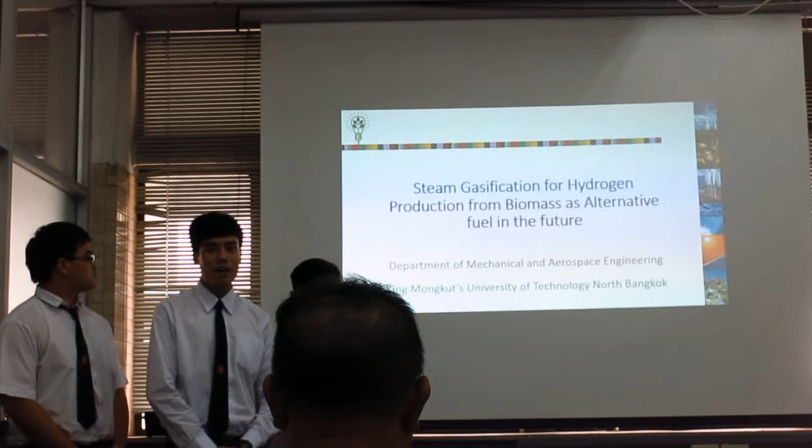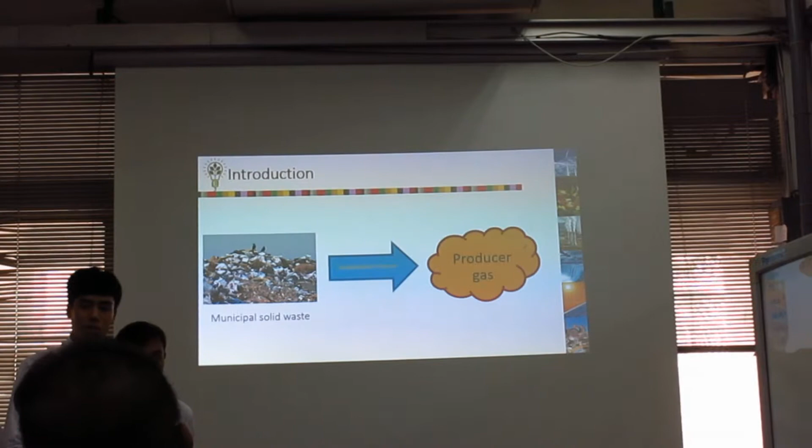First, I would like to give you a little background. Our purpose is to convert Thailand's municipal solid waste into energy through the process of gasification. Our research aims to produce hydrogen as much as possible, so we use steam as the gasification agent.

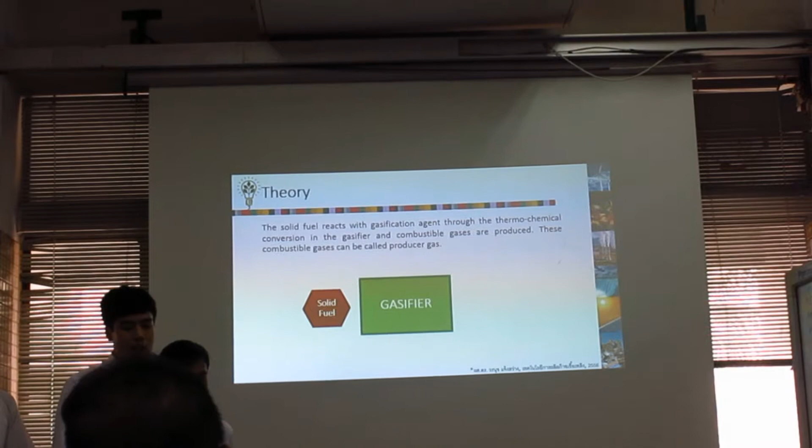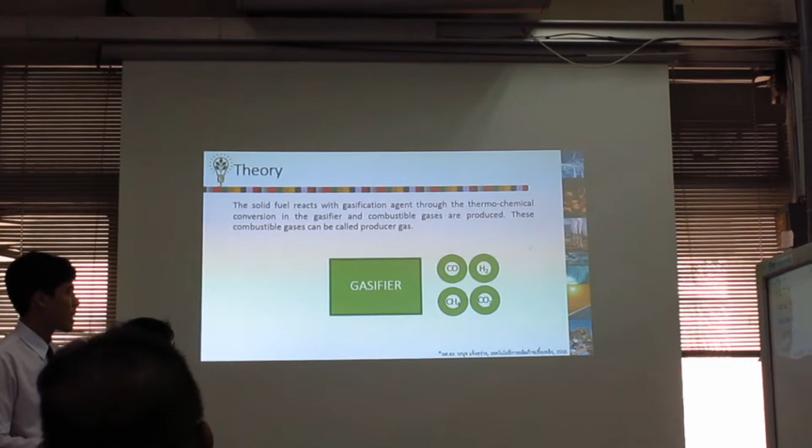From the theory of gasification, it's defined as solid fuel reacting with a gasification agent through thermochemical conversion to produce producer gas. The main producer gases are hydrogen, carbon monoxide, carbon dioxide, and methane. There are three types of gasification agents: air, oxygen, and steam.

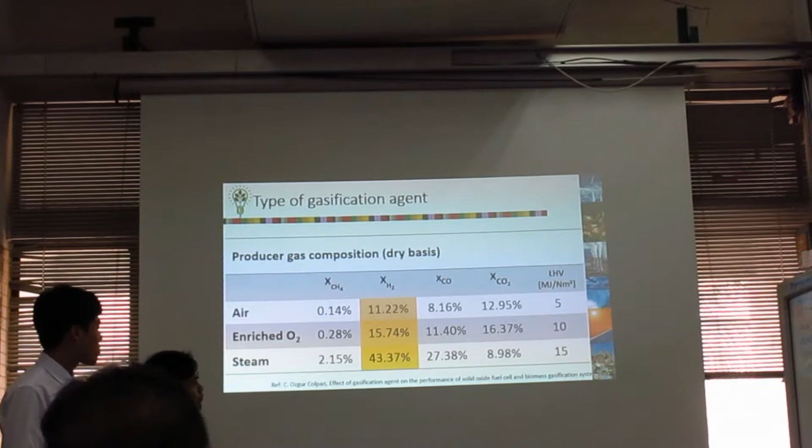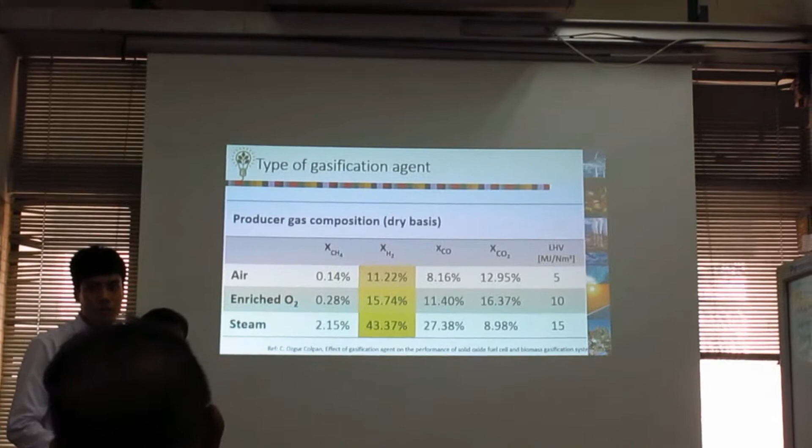In this case, we are focusing on producing hydrogen-rich producer gas, so we use steam as the gasification agent.

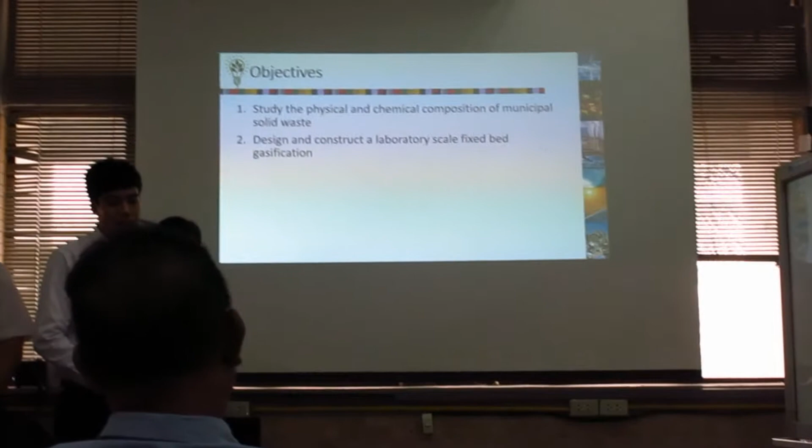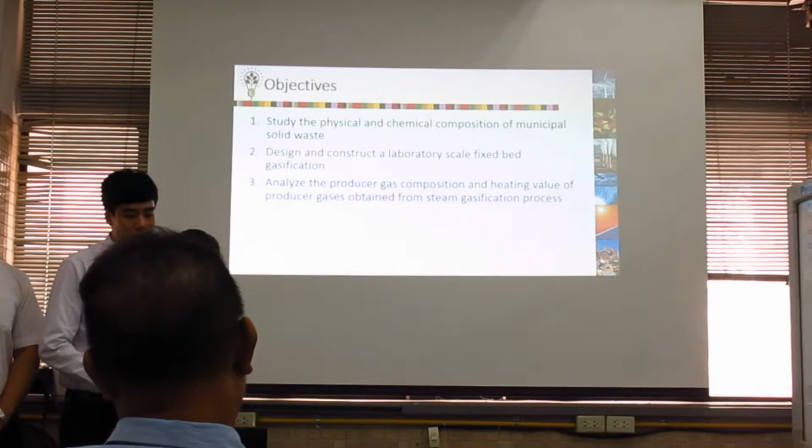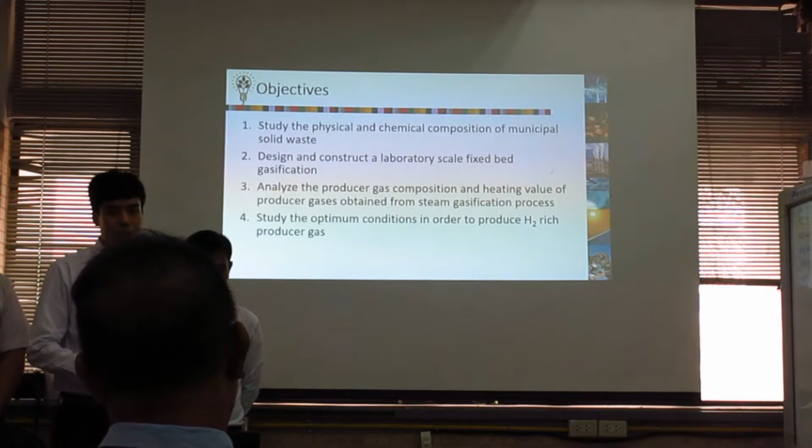This introduction brought us to the following objectives: first, to study the physical and chemical composition of municipal solid waste; second, to design and construct a laboratory-scale fixed-bed gasifier; third, to analyze the producer gas composition and heating value obtained from the steam gasification process; and last, to study the optimum condition for producing hydrogen-rich producer gas.

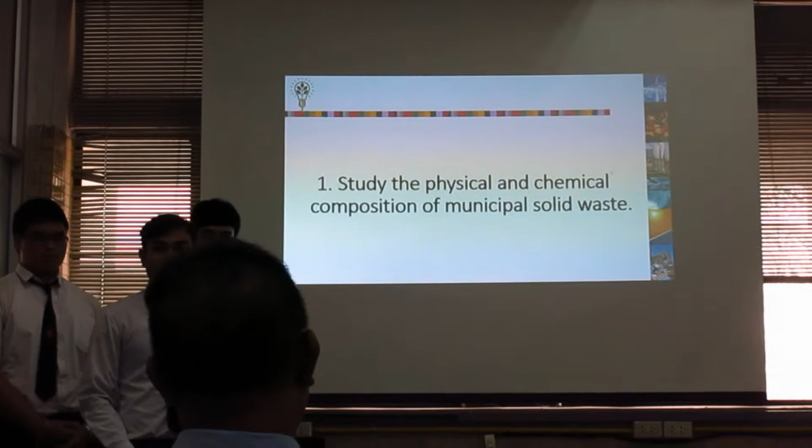So let's start with the first objective, which is to study the physical and chemical composition of municipal solid waste.

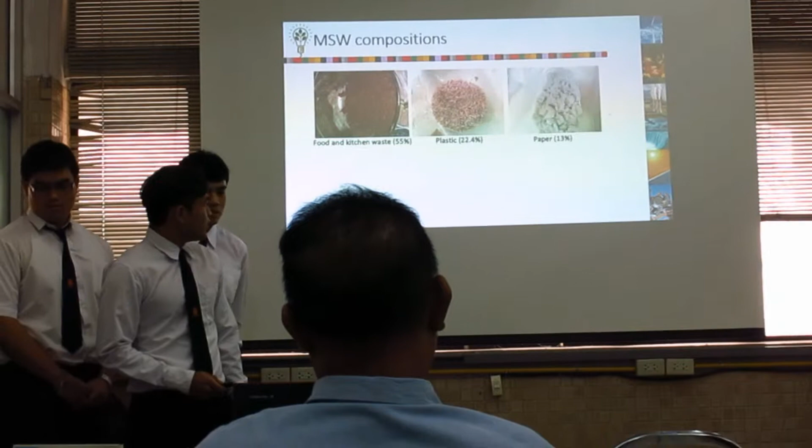From the literature review, these are the waste compositions we considered: food and kitchen waste 55%, plastic 22%, paper 13%, yard waste 5%, textile 3%, and rubber 1%.

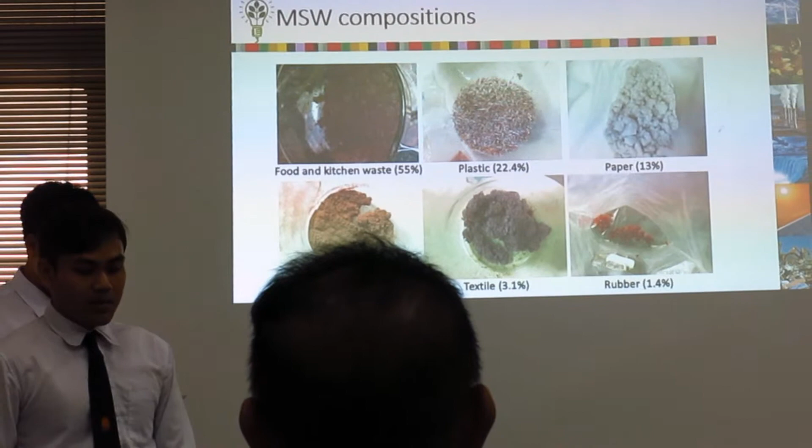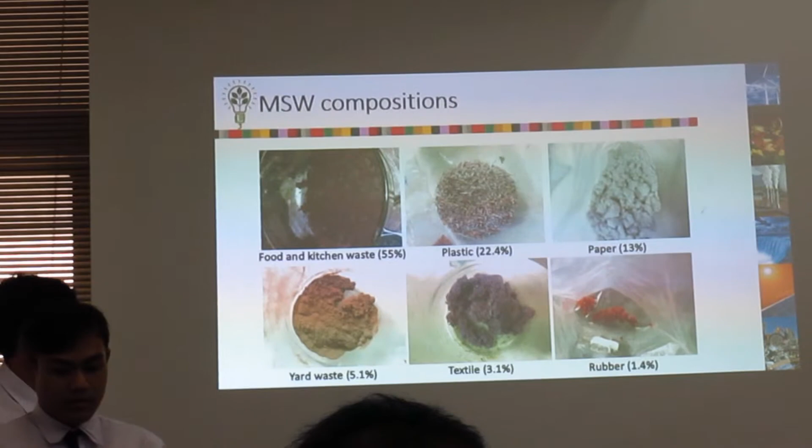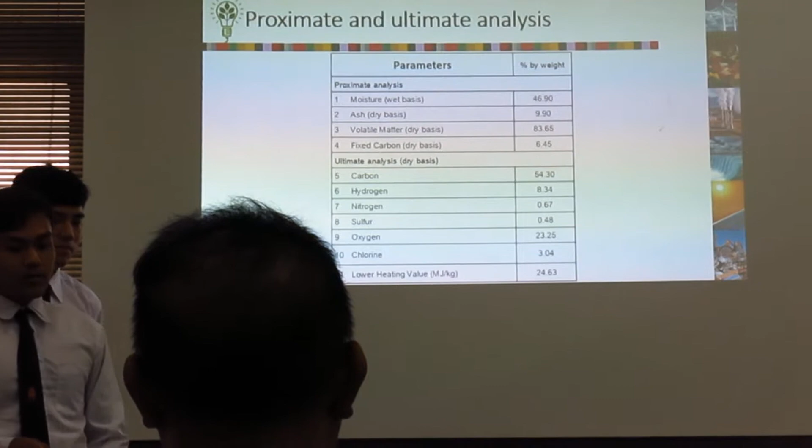This composition was prepared as a surrogate of municipal solid waste for our experimental sample. After that, we analyzed the composition of the sample, showing proximate and ultimate analysis. Proximate analysis shows the physical components, and ultimate analysis shows the chemical components.

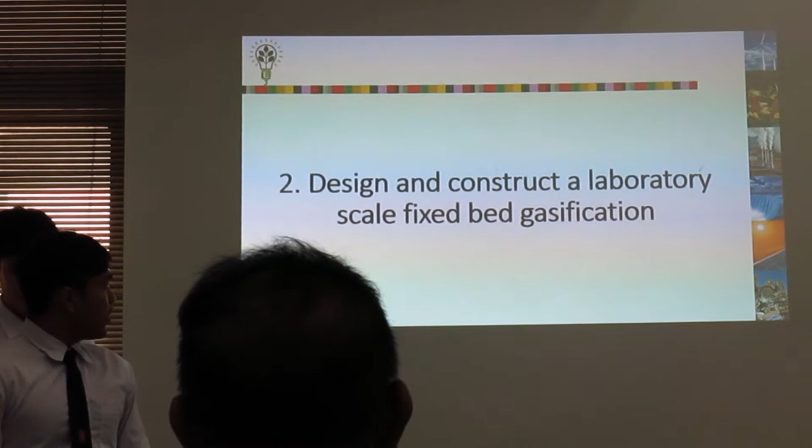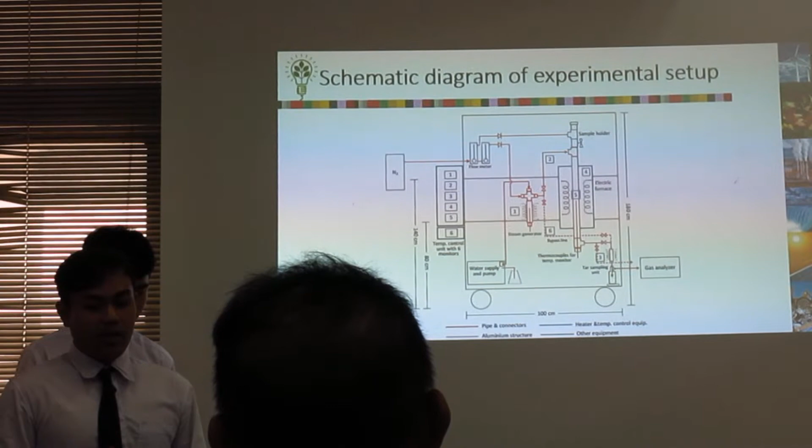Next is the second objective. This is the schematic diagram of the experimental setup. The experimental setup consists mainly of a fixed-bed reactor, furnace, steam generator, and gas analyzer.

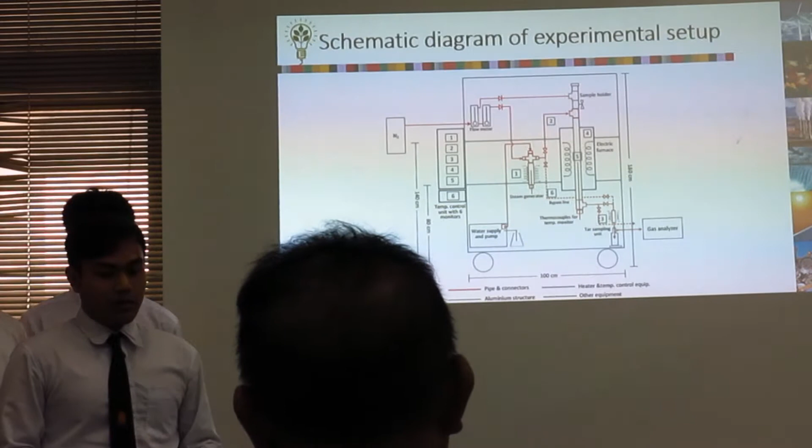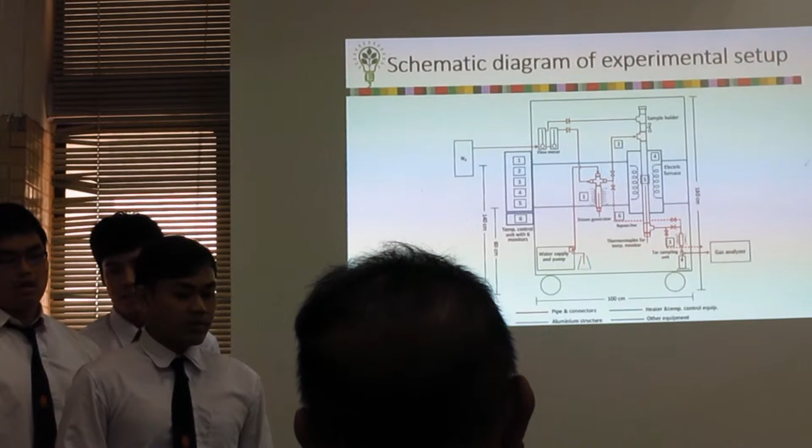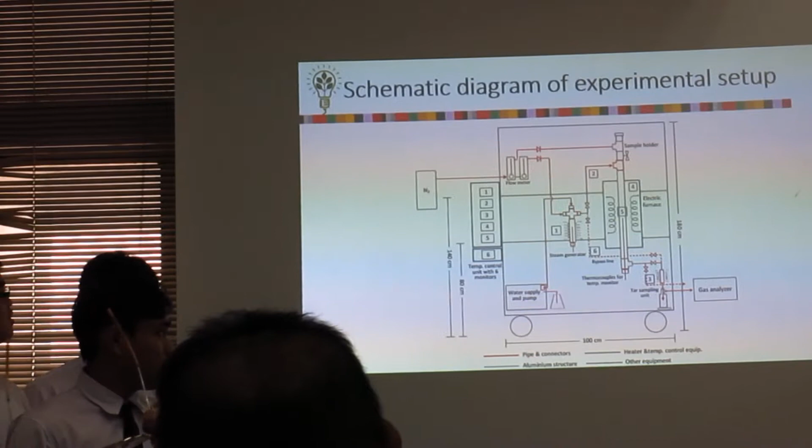The sample, surrogate municipal solid waste, is placed in the reactor and then dropped into the electrical furnace when we begin the experiment. Steam from the steam generator is fed into the reactor to proceed with the gasification process and produce producer gas. The composition of the producer gas obtained from the experiment is analyzed by the gas analyzer.

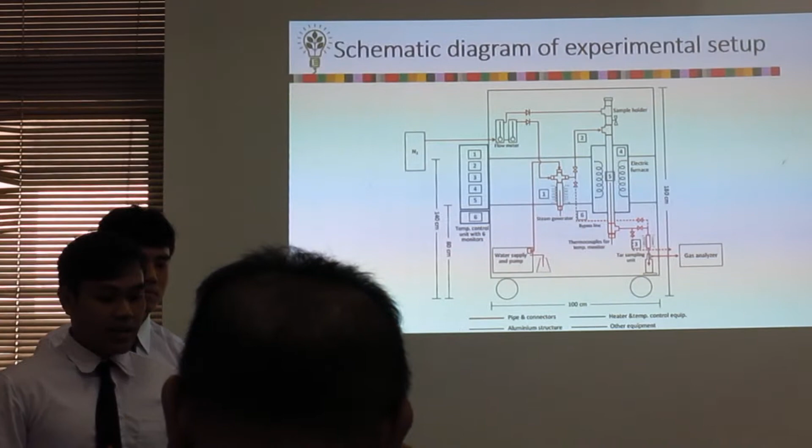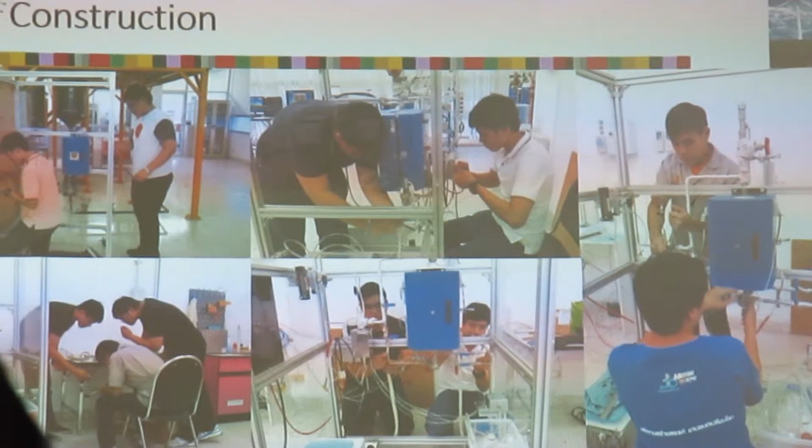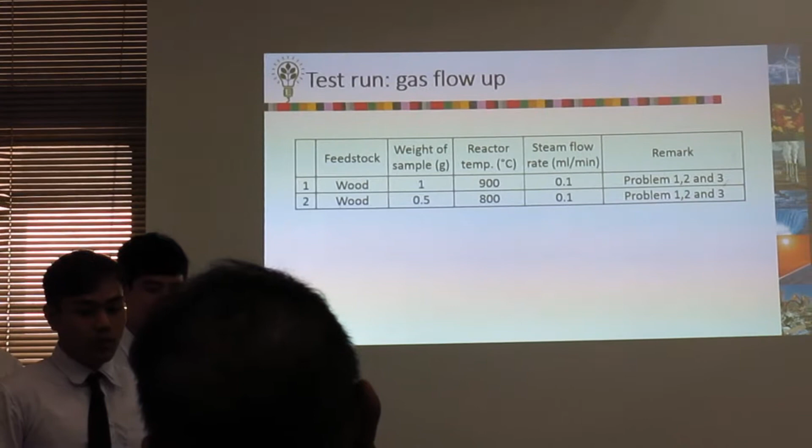After the schematic was complete, we began constructing our lab. After construction was complete, we ran some tests to see if it functioned correctly. In the first failed test run, we found some problems.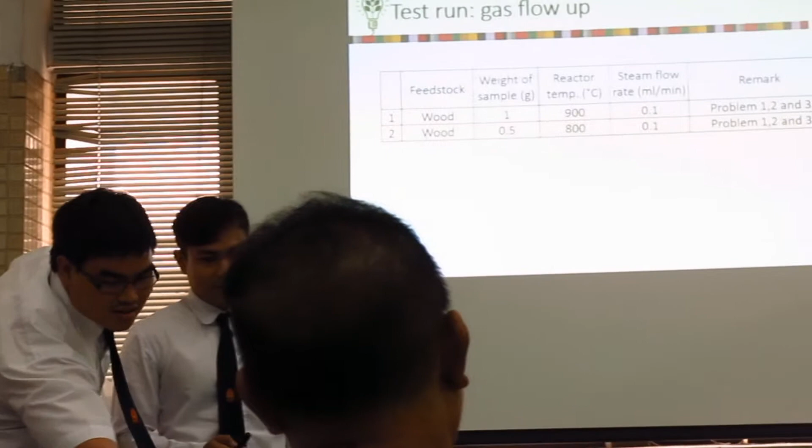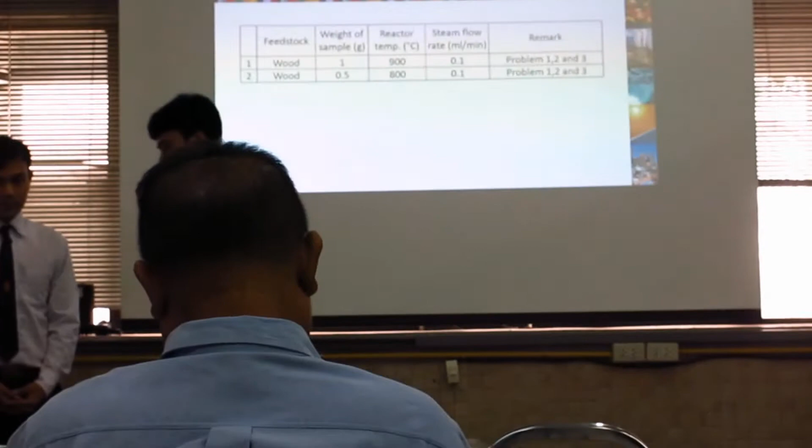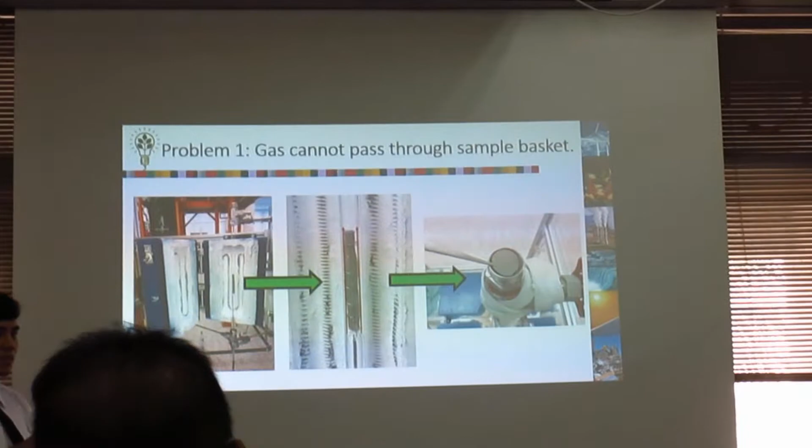Let's start with the first problem: the gas cannot pass through the sample basket. In our first lab design, we used a sample basket to pack the sample inside and drop it into the reactor. But we found the gas from the flow-up system could not pass through the sample basket, so we decided to replace the sample basket with a sample supporter.

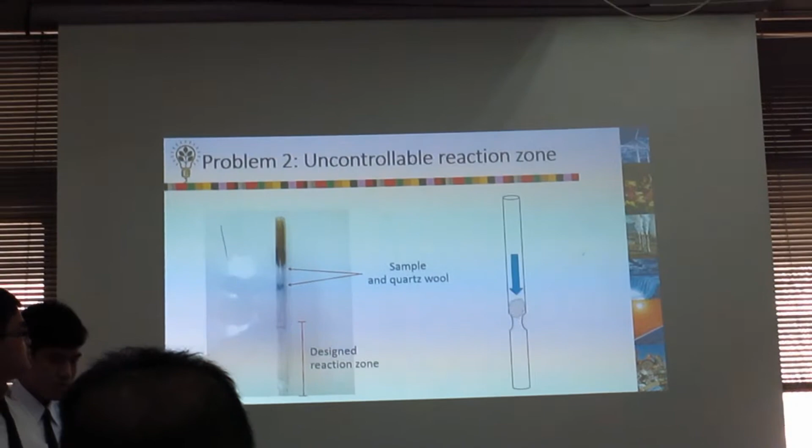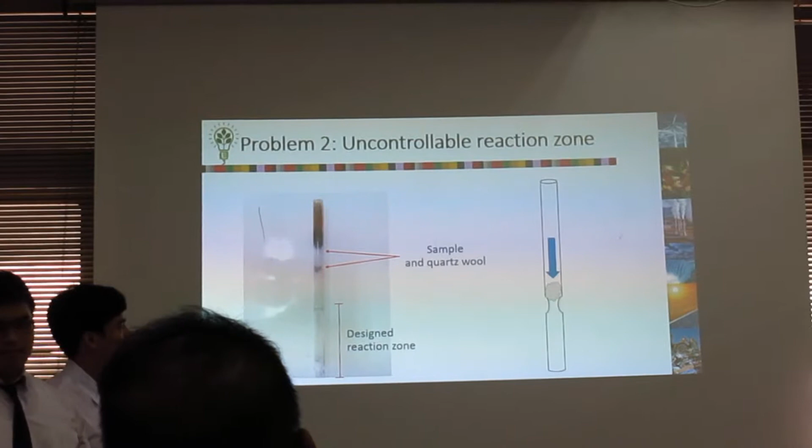The second problem is the uncontrollable reaction zone. As you can see, the sample inside the reactor is blown away by the flow-up system. After that, we decided to change the direction of flow from flow-up to flow-down.

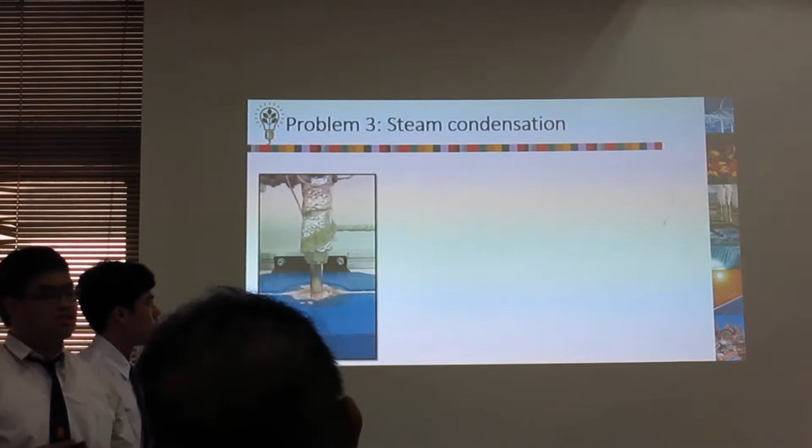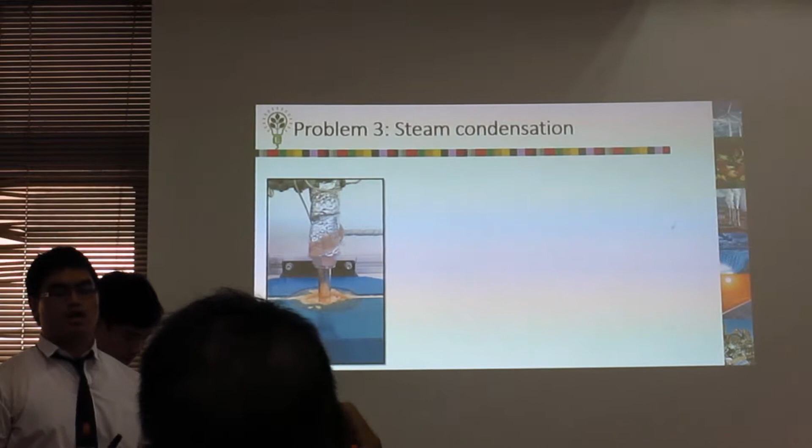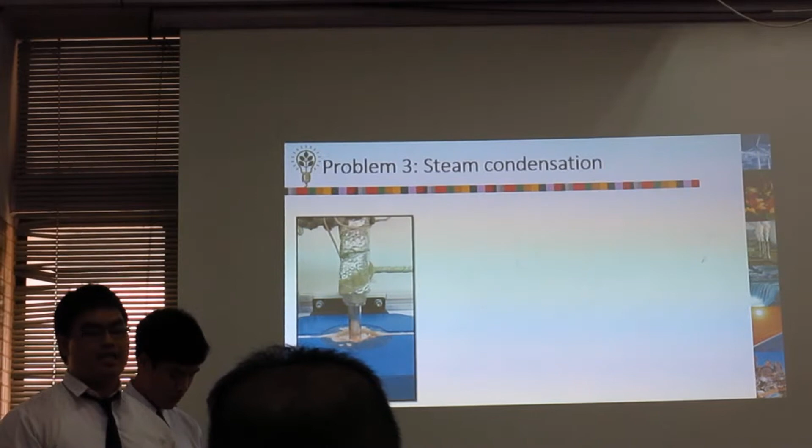The third problem is steam condensation. At first, we used insulators to wrap around equipment to prevent steam condensation, but they were not enough. So we replaced the insulator by adding heater tape and one more heater box for the steam.

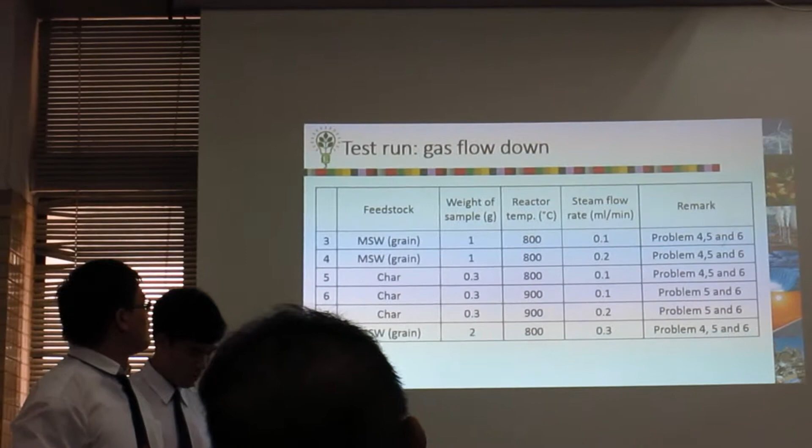After the first three problems were fixed, we continued running experiments, but we detected more problems: problem 4, 5, and 6.

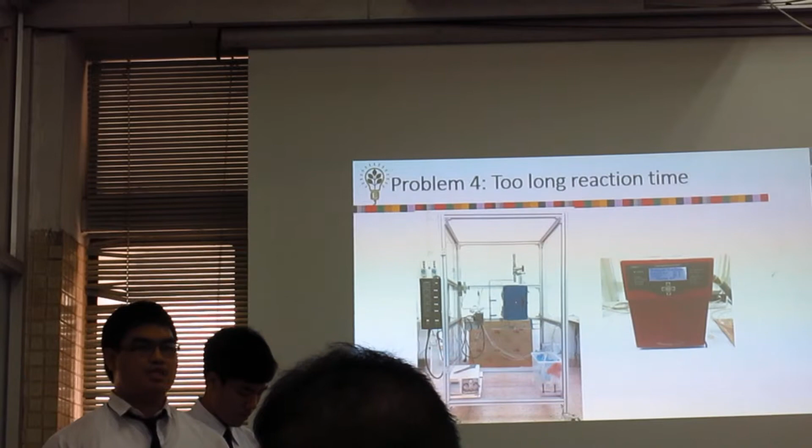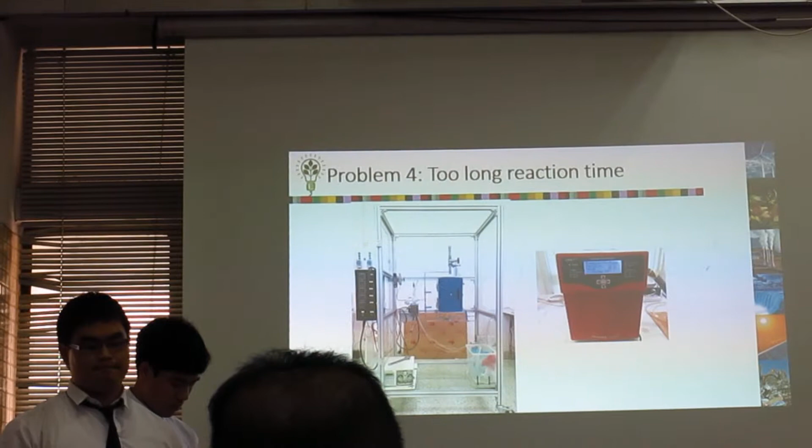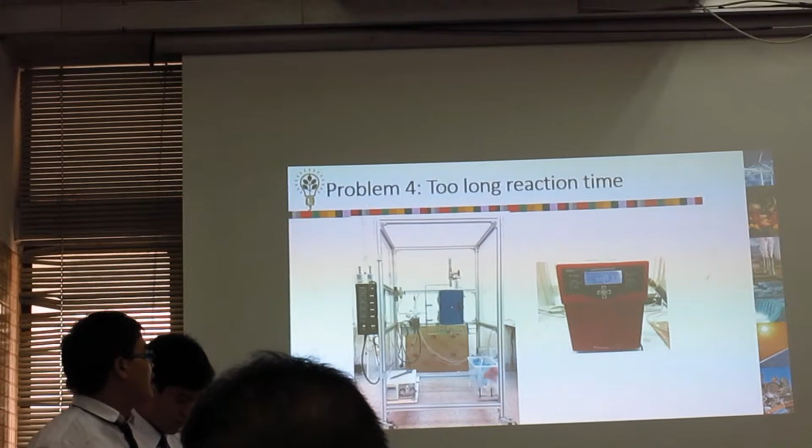The fourth problem is too long reaction time. There is a pipeline connecting our lab to our gas analyzer. We found that the gas lost speed when moving through the pipeline, so we removed it and connected our lab directly to the gas analyzer.

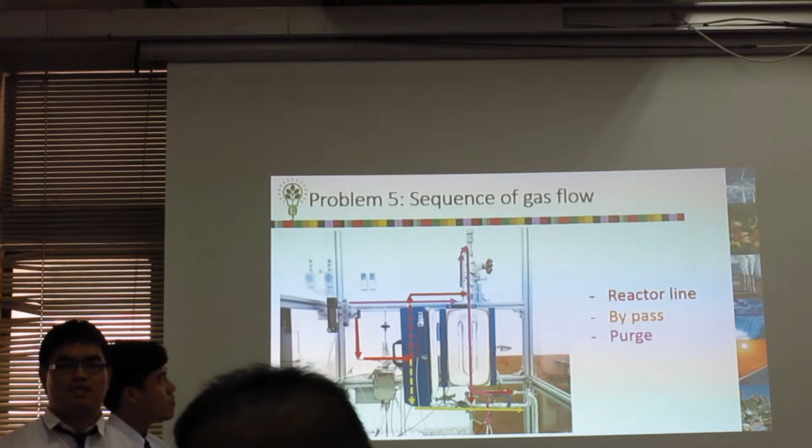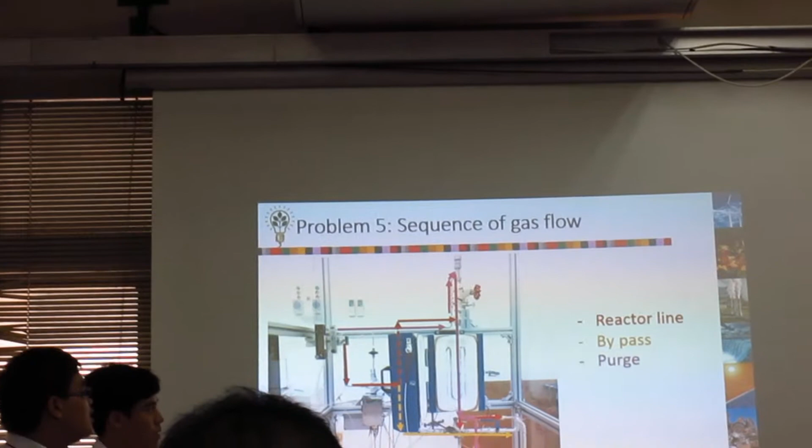The fifth problem is the sequence of gas flow. There was steam condensing in the area around the sample holder because we fed steam into the main line, shown in red, before the experiment began.

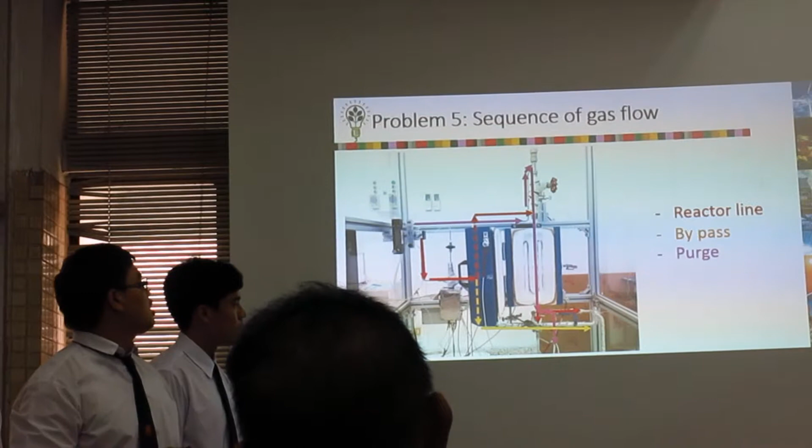We solved this problem by feeding our steam to a bypass line instead, shown in yellow, before the experiment begins. After we drop the sample from the sample holder into the reactor, we feed steam back to the main line.

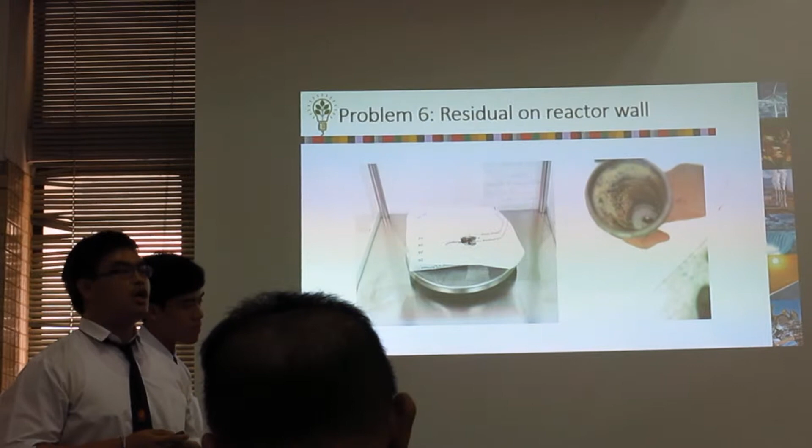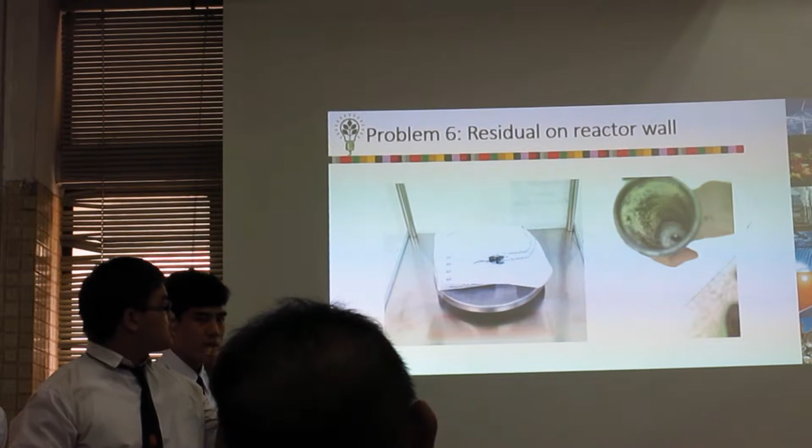The last problem is residue on the reactor wall. The residue comes from our sample. Some components of our sample are very small, and they stick to the reactor wall when we drop the sample.

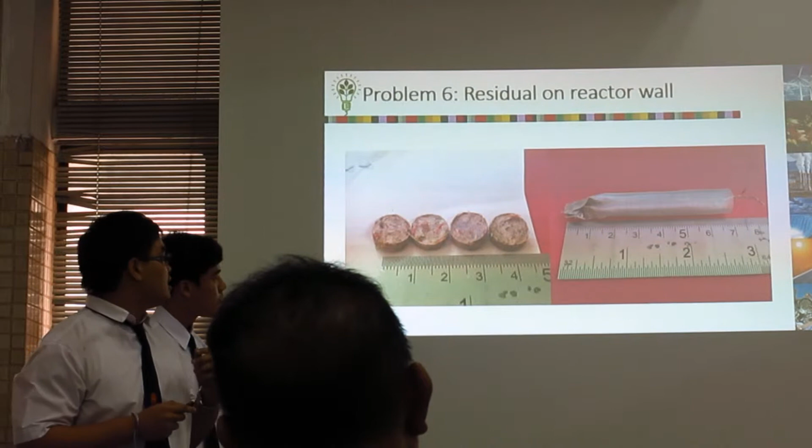Our solution is to compress our sample into a tablet shape and pack it in a mesh basket.

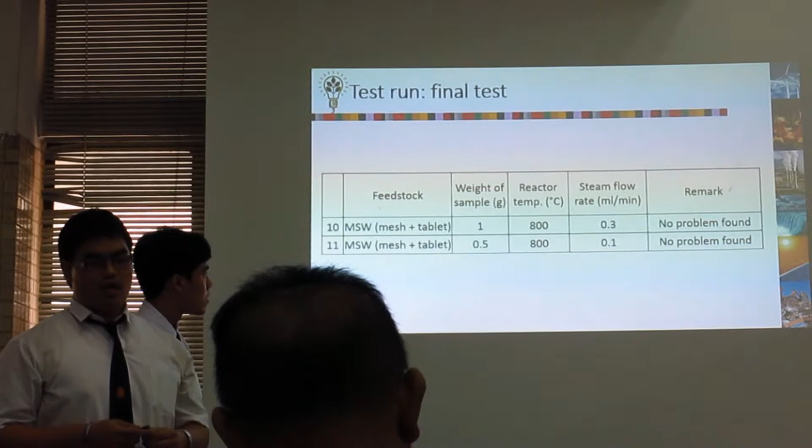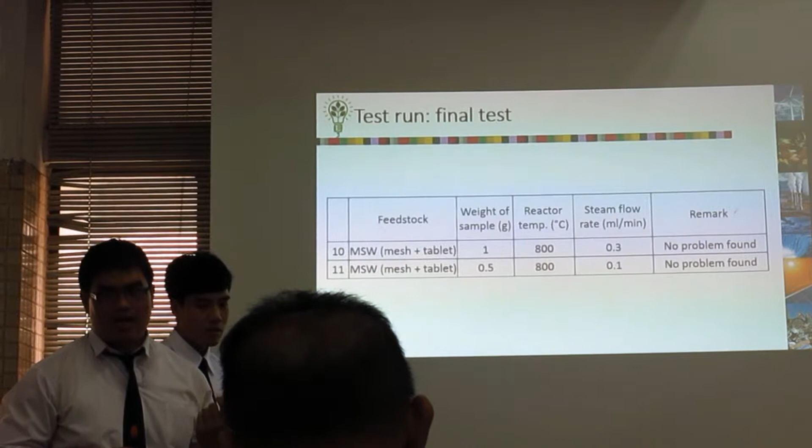After the problems were solved, we ran more experiments to confirm that no problems could be found, and our lab was successfully constructed.

This is our final gasification lab, with all problems solved and construction completed, which means our second objective is a success.

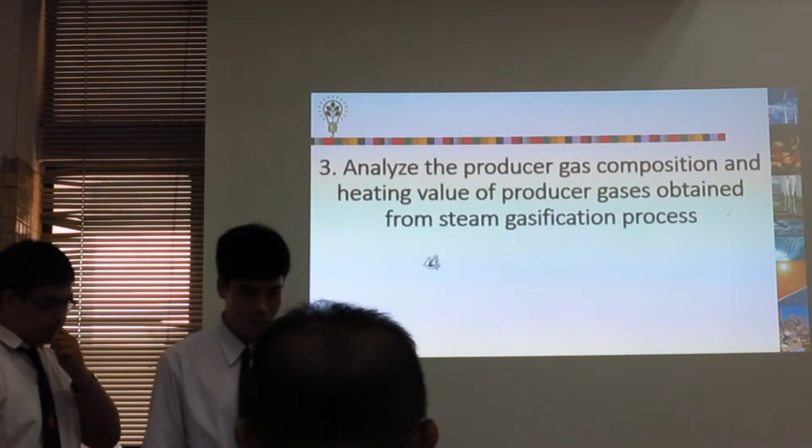Next we are going to show the third objective, analyzing the producer gas composition, and the fourth objective, studying optimum conditions simultaneously.

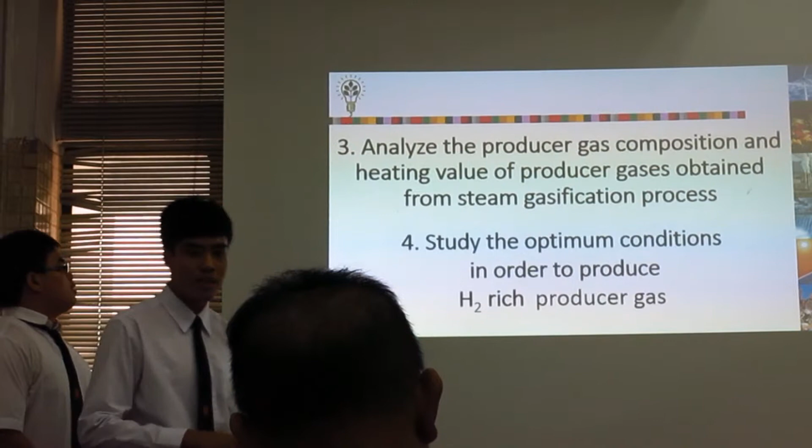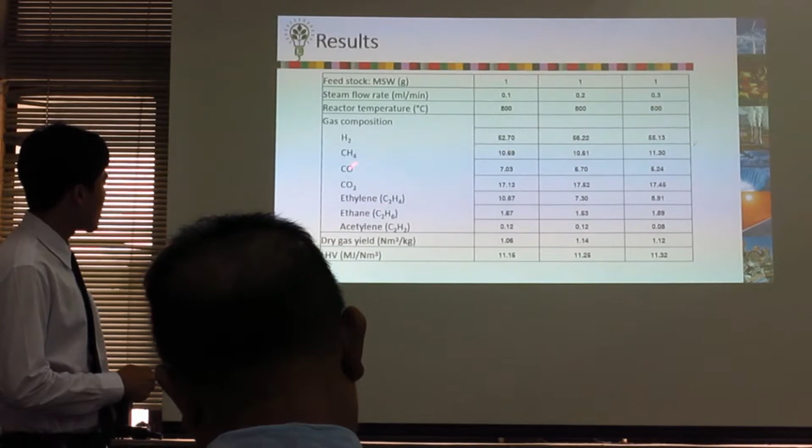This shows the results from the experiments we conducted. The results show the gas composition and heating value as we varied the steam flow rate from 0.1 to 0.3.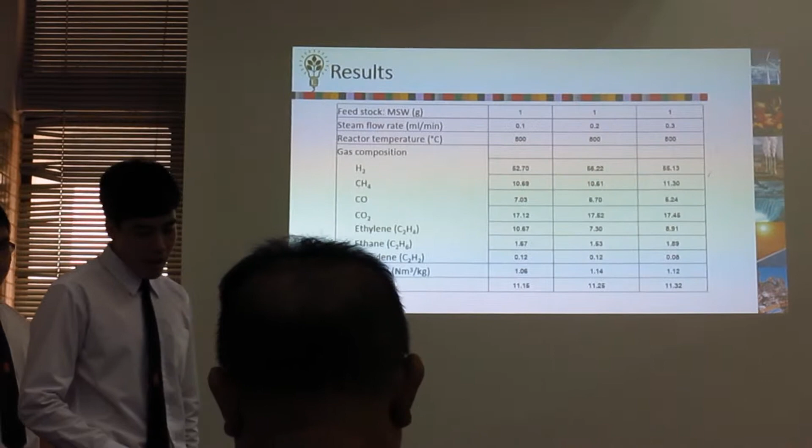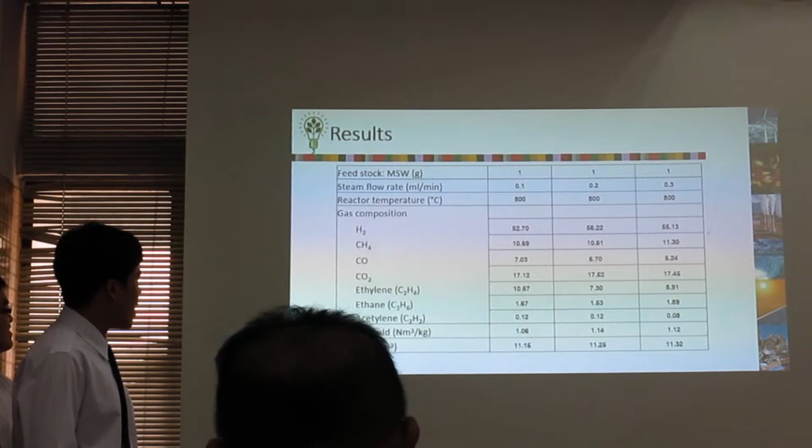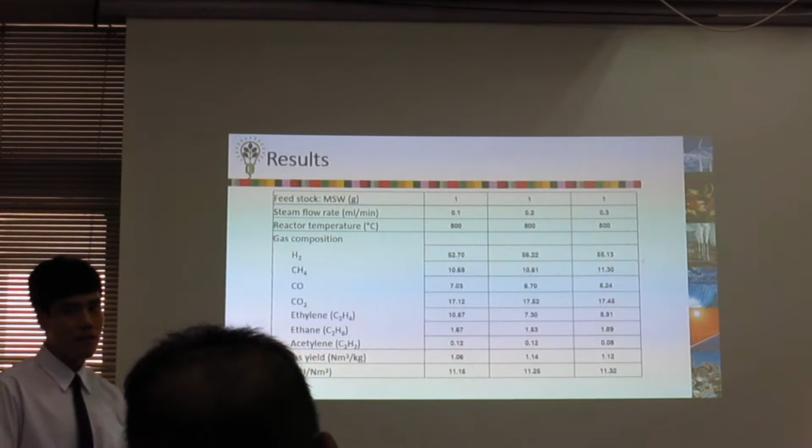From the results, we conclude that if we want hydrogen-rich fuel gas, we should use a steam flow rate of 0.2 milliliters per minute. But if we want a high heating value, we should use a steam flow rate of 0.3 milliliters per minute.

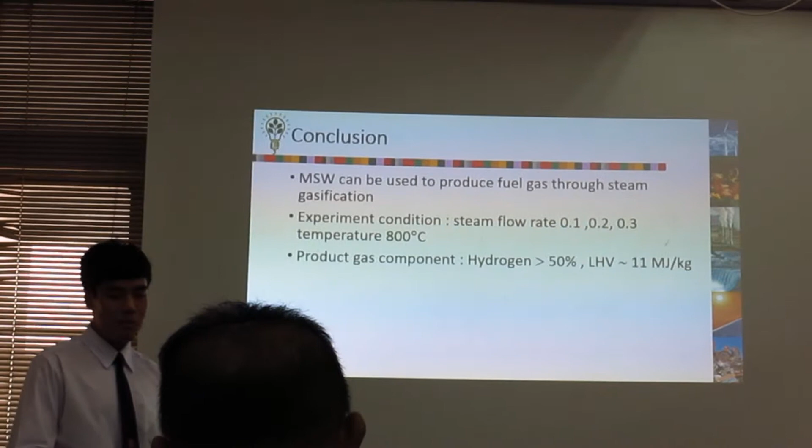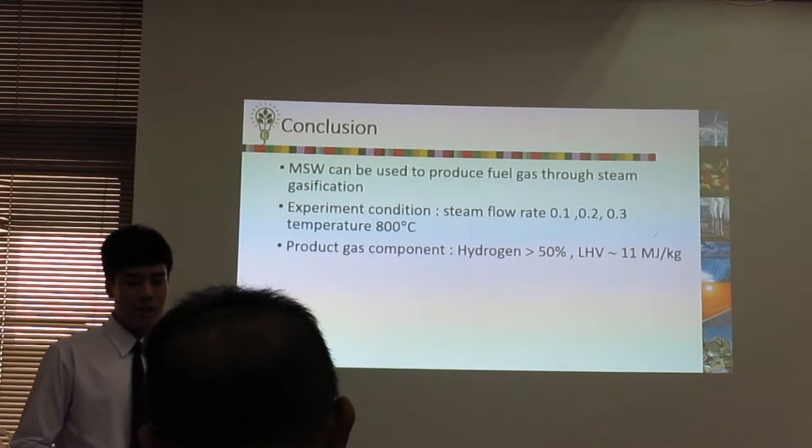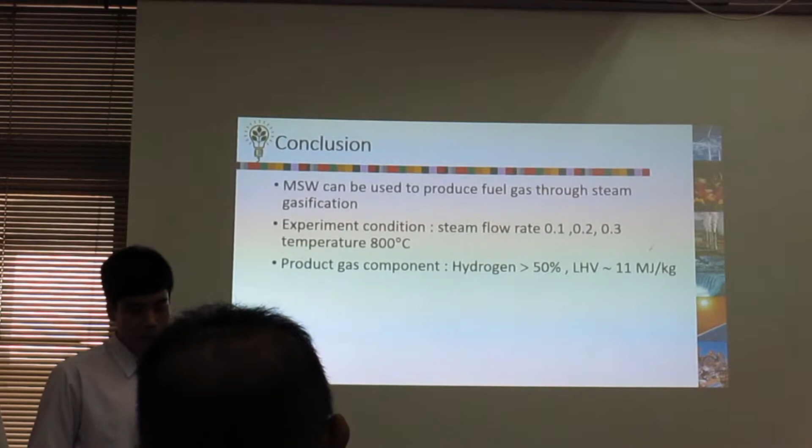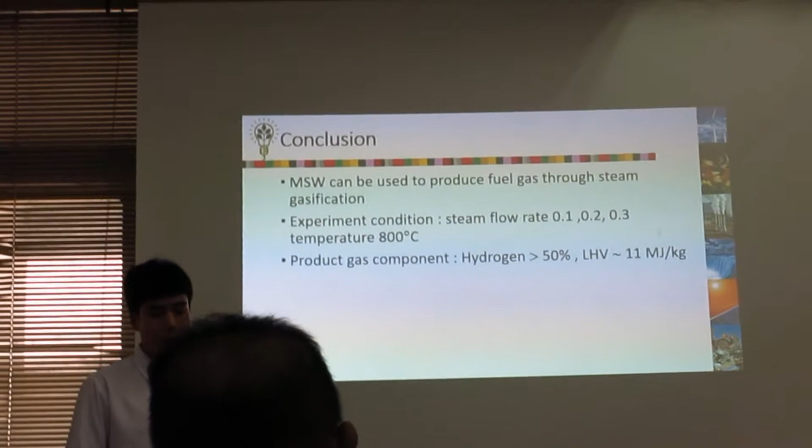Now we can pass through every objective and summarize as follows: Thailand municipal solid waste can be used as fuel to produce hydrogen-rich fuel gas through the steam gasification process, conducted at steam flow rates from 0.1 to 0.3 milliliters per minute at a reactor temperature of 800 degrees Celsius. The producer gas has a hydrogen component over 50%, and a heating value of about 11 megajoules per kilogram.

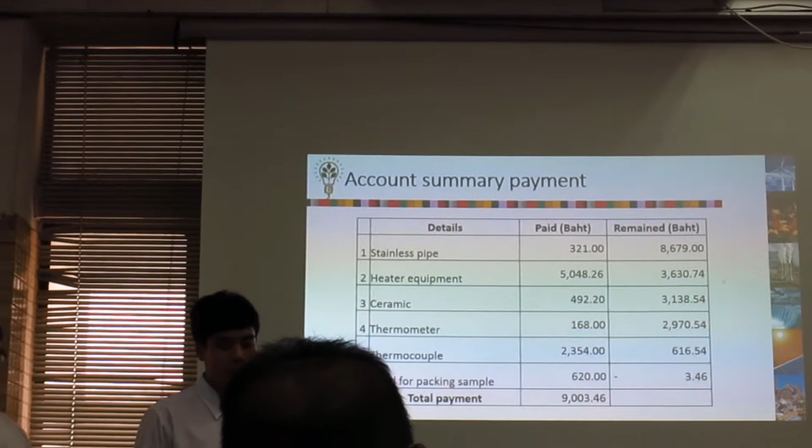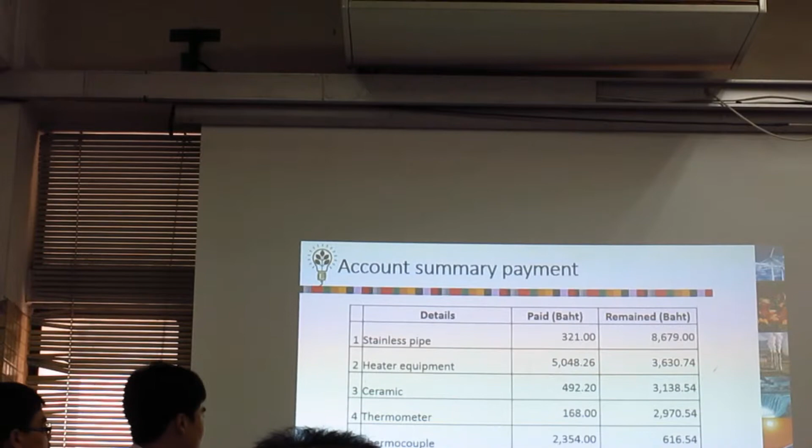Finally, I will talk about the actual budget summary. We used up all the given budget mostly for experimental equipment for our objectives, such as stainless steel pipe, heater equipment, ceramic, thermometer and thermocouple, and a mold for packing samples.